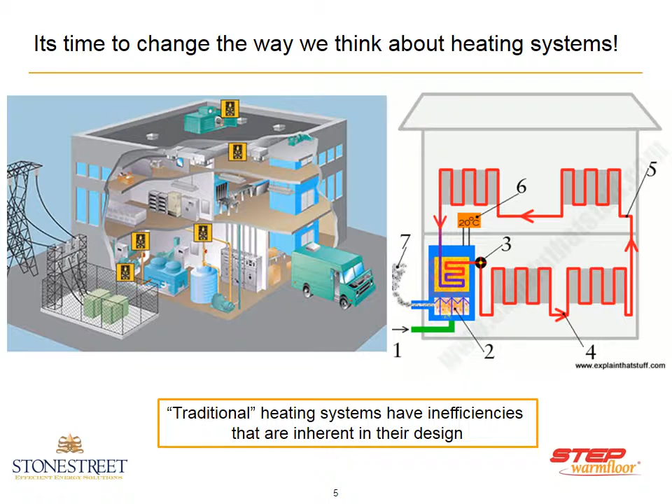It's our goal at STEP Warmfloor to change and challenge the way that people think about heating systems. What you're seeing on the graph here are 2 very typical heating system scenarios. On the left is an industrial building where heat is manufactured in the basement and then transferred up to the 2nd and 3rd floor through a series of ductwork or pipes if it's a hydronic system. And in the delivery of that, there are huge inefficiencies simply inherent in their design.

You certainly don't have to look very far when looking at traditional systems to see the inefficiencies and the parts and moving components of a traditional heating system.

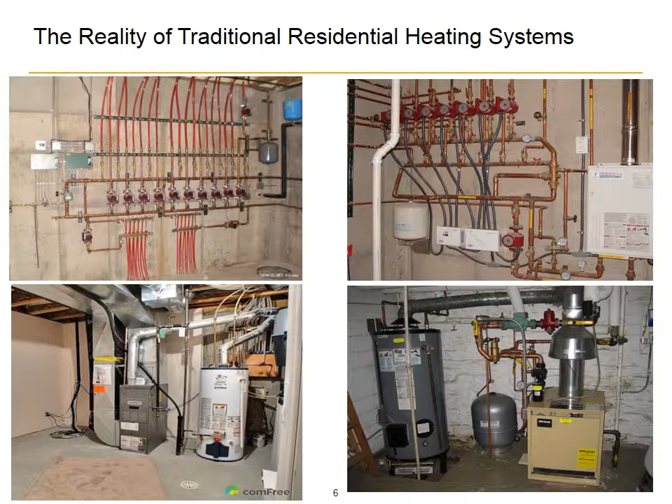We are changing the way that people think about heat by introducing the STEP Warmfloor PTC heater. A PTC heater is an extremely thin and flexible heating element. It's in fact only 1.2 millimeters thick and completely flexible.

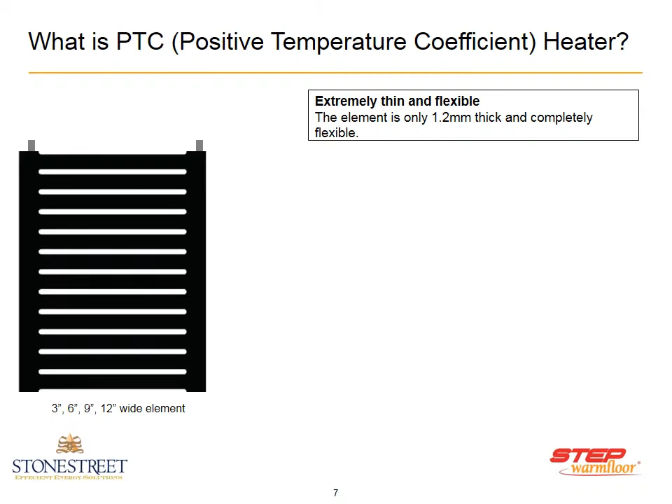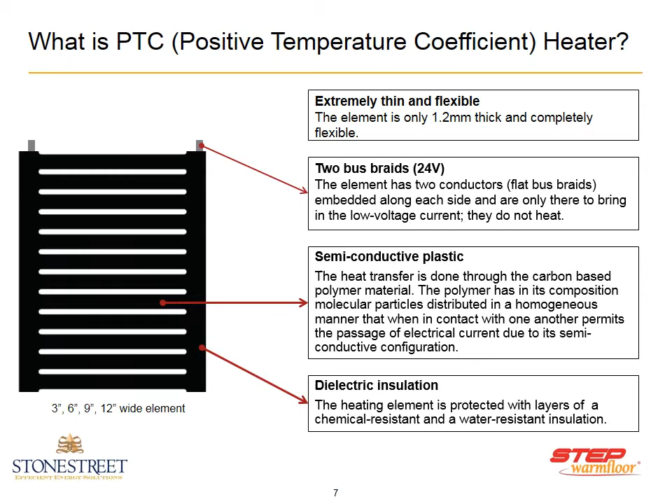The element is made from a semiconductive plastic where carbon is infused in a plastic polymer mix, and the whole element becomes energized. It's energized by 2 bus braids that are flat and embedded along each side, and those bus braids bring the low voltage current to the heating element. In fact, what you're seeing here, this whole element actually gets hot.

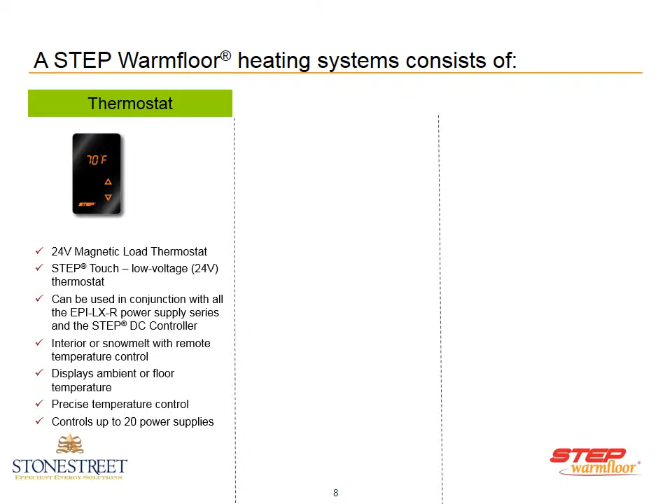A STEP Warmfloor system consists of 3 main components: a thermostat, a step-down transformer where we step down line voltage at 120 volts down to 24 volts, and we connect that to the heating element. We design all of our systems custom for every application.

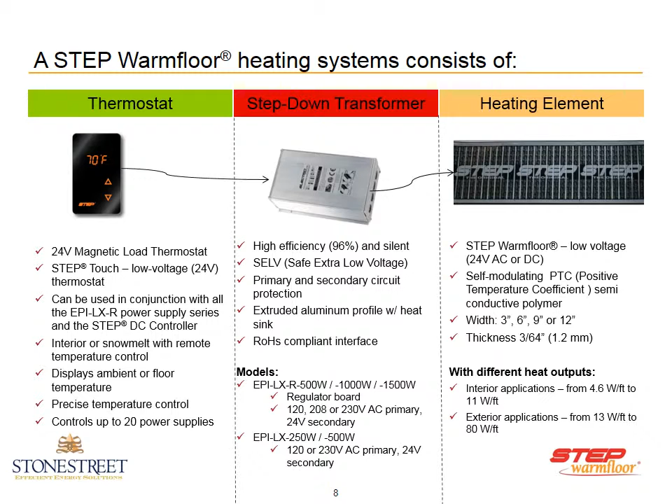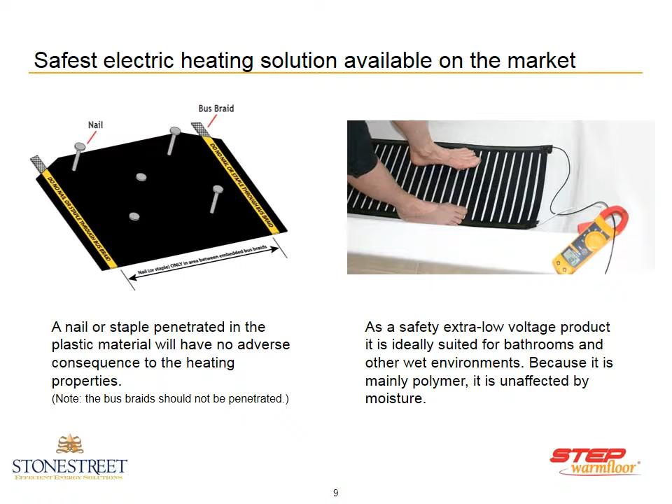Our PTC heater actually runs on 24 volts AC or 24 volts DC. What that means is that you can connect our heating element directly to a solar power source or a wind generator and heat your home completely off the grid.

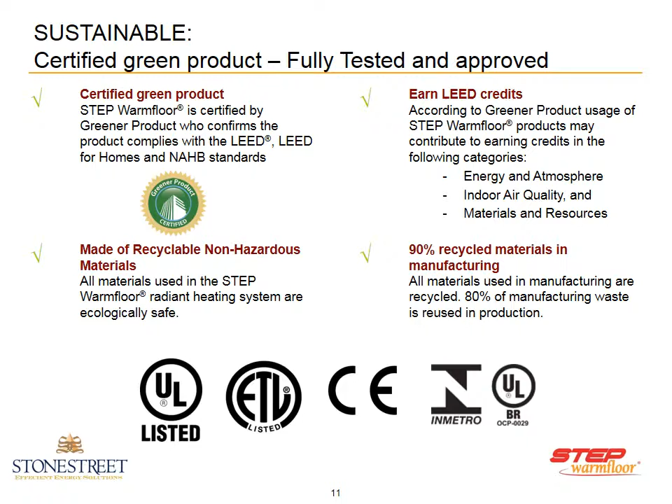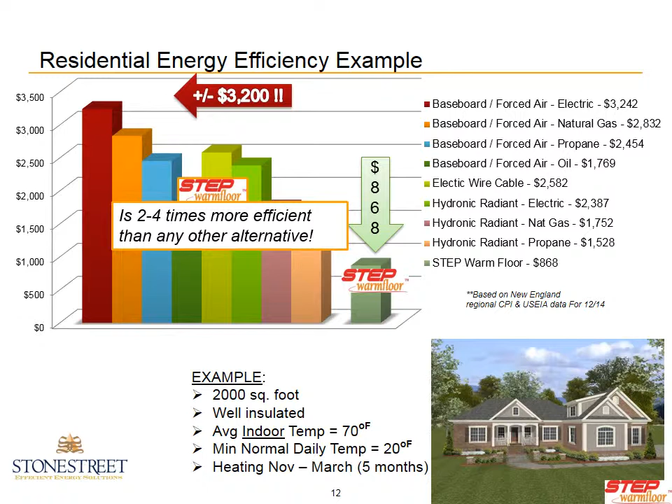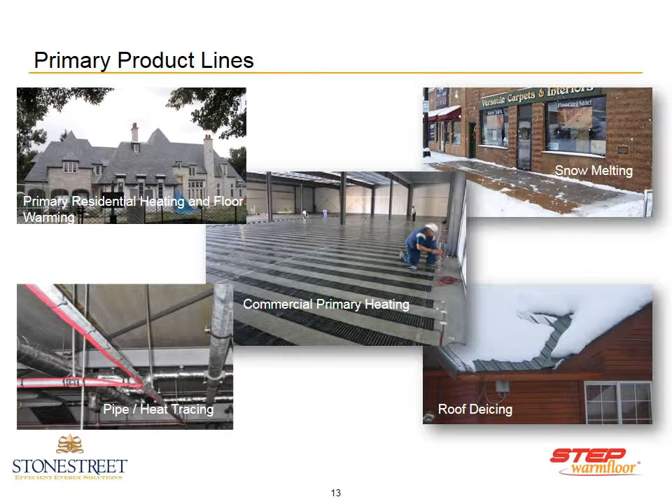Our primary product lines are residential heating and floor warming, commercial heating, snow melting, roof de-icing, and pipe heat tracing for industrial applications.

When considering STEP Warmfloor, each of the project stakeholders have various benefits that they enjoy. At the core, each of the stakeholders will appreciate the global and environmental benefits. Each of the other stakeholders, be it the architect, the contractor, the occupant or resident, and the project owner, all have various benefits that they enjoy.